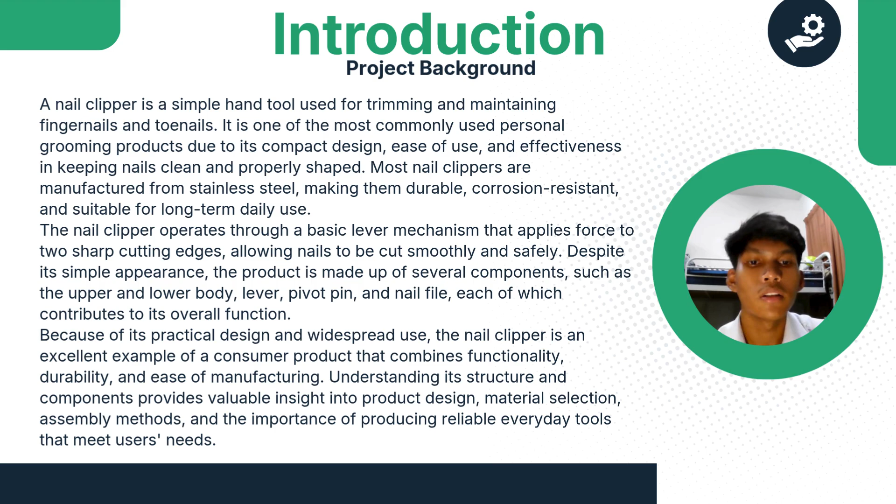Because of its practical design and widespread use, the nail clipper is an excellent example of a consumer product that combines functionality, durability, and ease of manufacturing. Understanding its structure and components provides valuable insight into product design, material selection, assembly methods, and the importance of producing reliable everyday tools that meet all of users' needs.

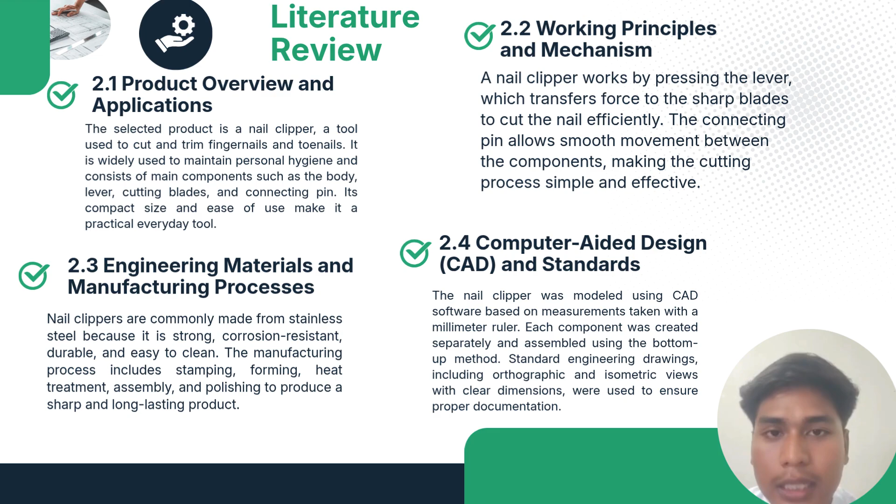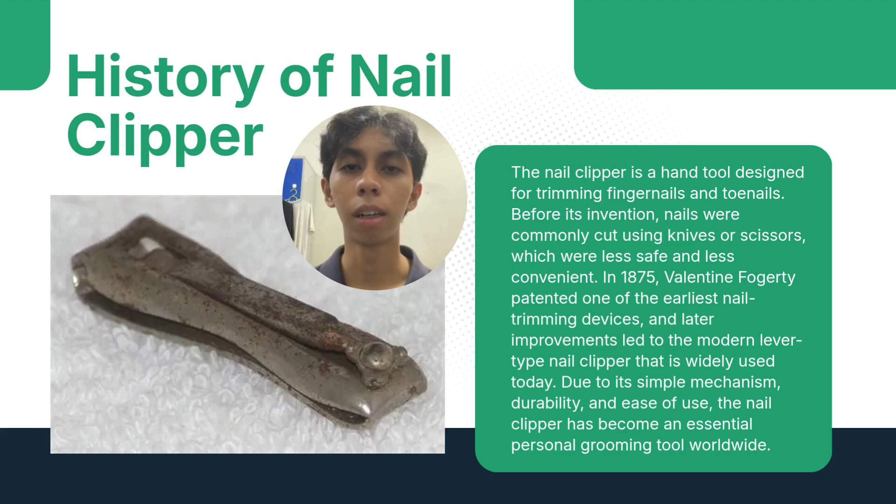Next is the history of the nail clipper. The nail clipper is a hand tool used to trim fingernails and toenails. Before nail clippers were invented, people usually trimmed their nails using knives or scissors, which were less safe and less convenient. In 1875, Valentine Fogerty patented one of the earliest nail trimming devices. Over the years, the design was improved into the modern lever type nail clipper that we use today. Because of its simple mechanism, durability and ease of use, the nail clipper has become an essential personal grooming tool worldwide.

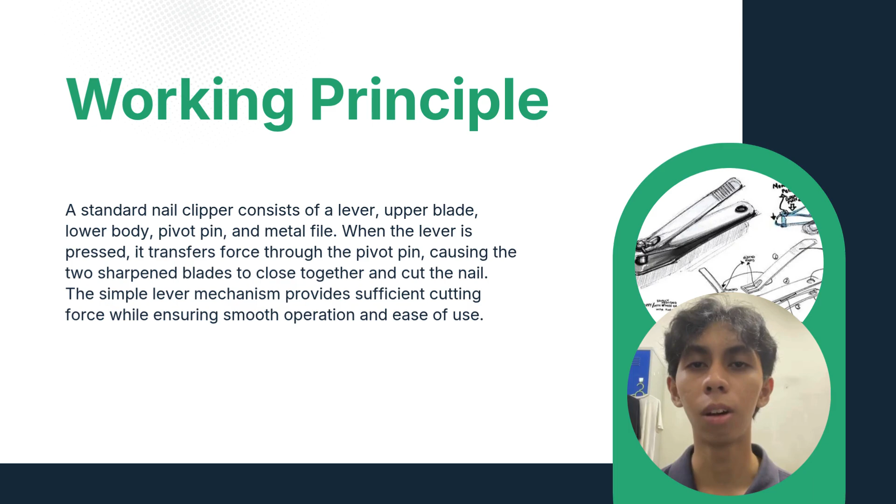Now, I will explain how the nail clipper works. A standard nail clipper consists of a lever, an upper blade, a lower body, a pivot pin, and a metal file. When the lever is pressed, the applied force is transferred through the pivot pin, causing the two cutting blades to close together and cut the nail. This simple lever mechanism increases the applied force, allowing the nail to be cut efficiently while requiring only a small amount of effort from the user.

In this slide, I will talk about the components' physical shape and function. First, we have the upper lever, a curved metal lever mounted on top of the clipper. Its function is to apply force to the cutting blades when pressed. Second, we have the upper blade, the movable curved cutting blade attached to the lever. It works with the lower blade to cut the nail. Third, we have the lower blade, the stationary base of the nail clipper. It supports the nail and provides the lower cutting edge.

Next, we have the pivot pin. The pivot pin is a small cylindrical pin connecting the lever and blades. Its function is to act as the pivot point, allowing smooth rotational movement. Lastly, we have the nail file, a thin metal extension integrated with the lever. It is used to smooth rough nail edges and clean under the nail.

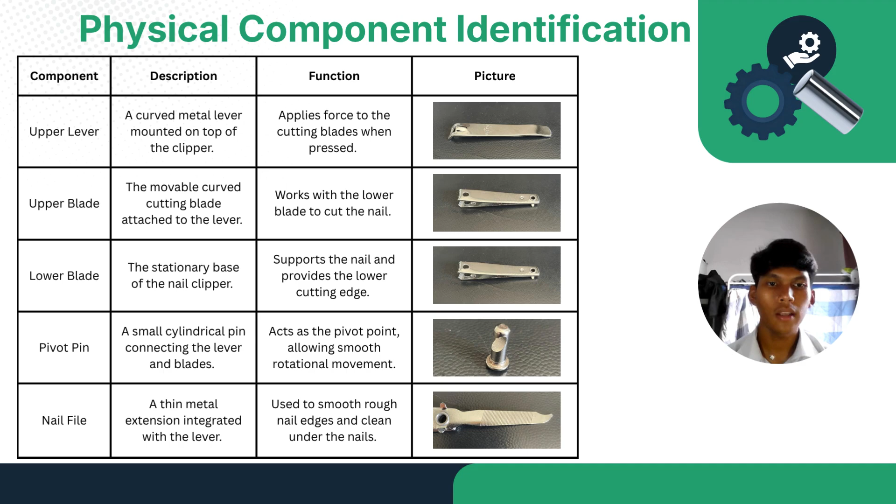I will talk about the 4 key subcomponents. To understand how this product tool functions, we first isolated and analyzed its 4 primary structural components. First, we have the base. This is the rigid flat bottom plate that acts as the primary datum plane for the assembly. It is completely stationary during the operation and provides the solid foundation against which shearing forces are directed.

Second is the blade. This is the upper curved leaf component. It is stamped from spring tempered stainless steel, allowing it to behave as a cantilever leaf spring. It contains a curved shearing edge at the front that aligns with the base.

The third one is the lever. This is the primary control interface. Its ergonomically shaped handle features a hook-style socket at the front to capture the pivot pin, translating the user's downward thumb pressure into a concentrated vertical movement.

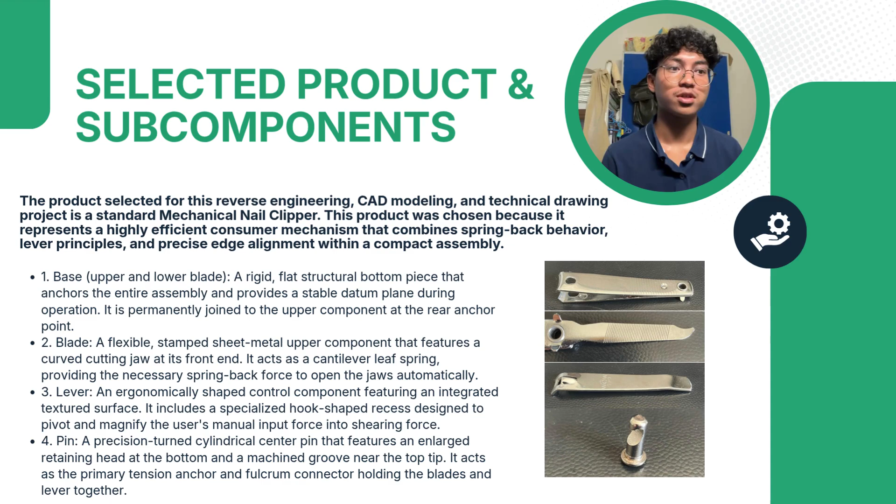And finally, we have the pin, acting as the central vertical anchor. It is a cylindrical pin featuring a wide bottom head to catch the lower base, and a small groove near the top that securely locks into the lever's hook socket, holding the entire assembly under slight constant tension.

Now I'm going to present the bill of materials. In this production, all of the components use stainless steel, because it prevents the product from rusting, so the product can last longer. For the upper lever component, the material, like I said, is stainless steel. The quantity we use is one. The function is to apply force to operate the nail clipper.

For the upper blade, the material is stainless steel. The quantity is also one, and the function is to form the upper cutting edge for trimming nails. For the lower blade, the material is stainless steel. The quantity is also one, and the function is to support the nail and provide the lower cutting edge.

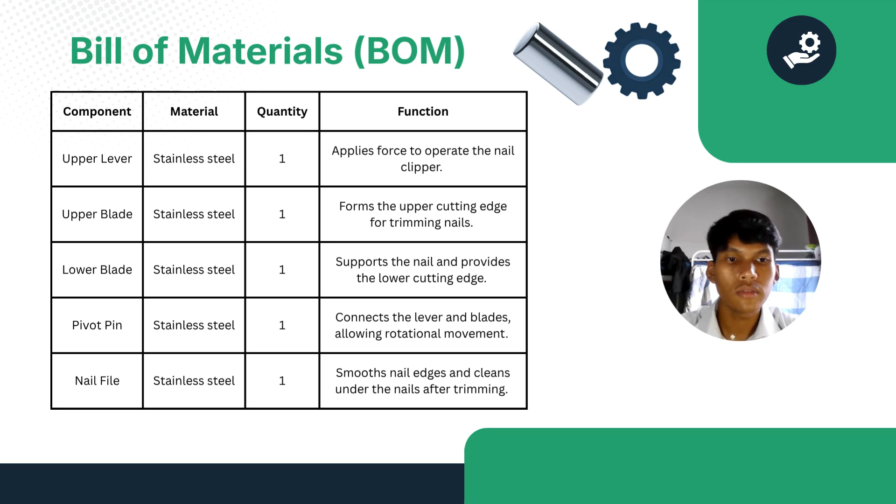Next component is the pivot pin. The material is also stainless steel. The quantity is also one, and the function is to connect the lever and the blades to allow rotational movement. And lastly, the nail file. The material is also stainless steel, and the quantity also one. It is used to smooth the nail edge and clean under the nail after trimming.

Next, let's discuss the product's operational process. The clipper operates on a compound system, a class 2 mechanical lever working in tandem with a cantilever spring mechanism. This process is divided into three distinct phases. Phase 1 is setup and activation. When stored, the lever lies flat against the body to minimize space.

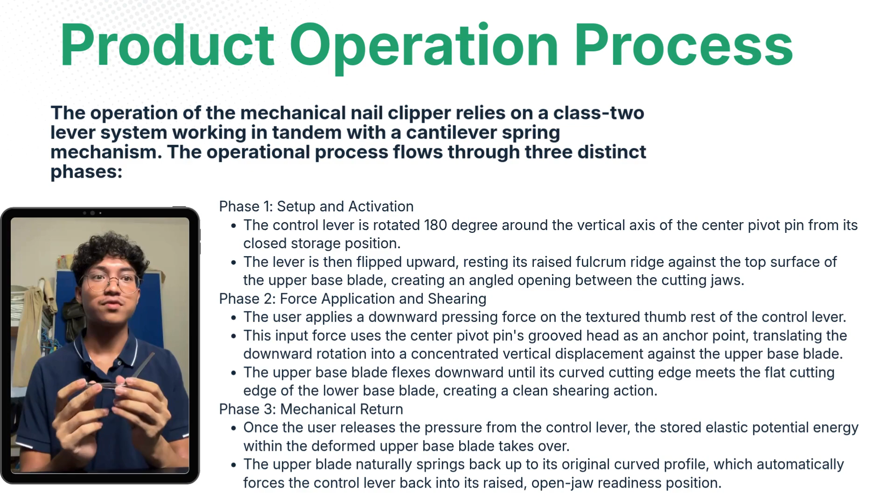To operate, the user rotates the lever 180 degrees around the vertical axis of the pin, then flips it up like this. This rests a raised ridge on the underside of the lever as a fulcrum firmly against the upper blade, creating the open jaw configuration.

Phase 2 is force application and shearing. When the user presses down on the lever like this, the mechanical action begins. Using the center pin's head as the tension anchor, the lever pivots down on its fulcrum ridge. This amplifies the finger force, displacing the flexible upper blade downward.

The curved cutting edge of the upper blade meets the flat edge on the stationary base, creating a highly concentrated shearing force capable of cutting through dense material cleanly.

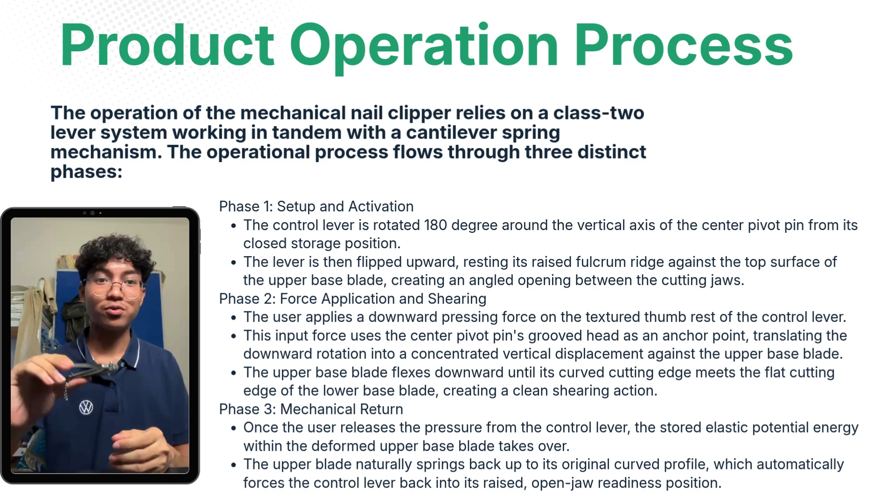The final step in the cycle is phase 3, the mechanical return. Once the user releases the downward pressure on the control lever, the stored elastic potential energy within the deformed upper blade is discharged. Because the blade was manufactured to act as a spring, it immediately returns to its natural curved open jaw.

This upward vertical force pushes against the front of the control lever, automatically pivoting it back up to its ready position. This mechanical return loop operates seamlessly without requiring any secondary spring, demonstrating the clever self-resetting efficiency of this simple mechanism.

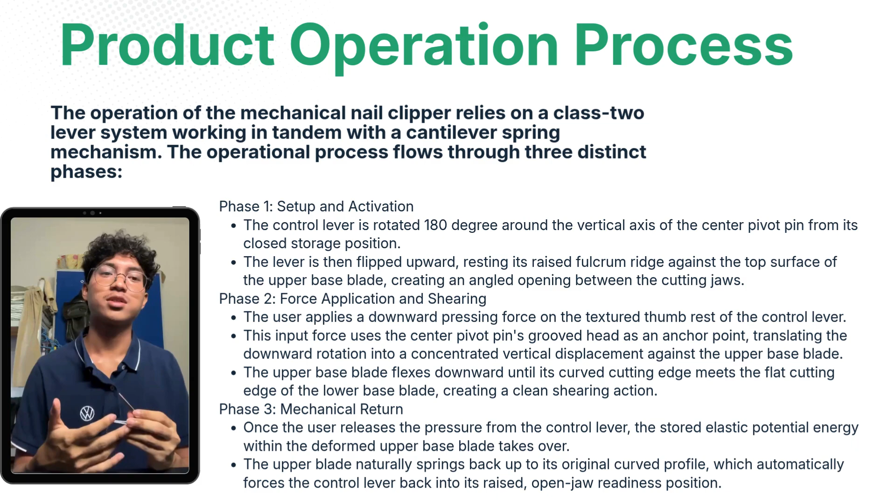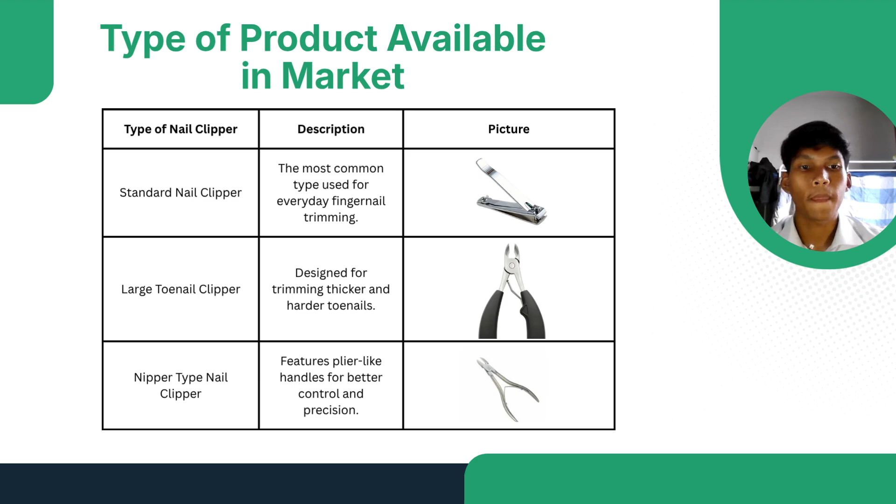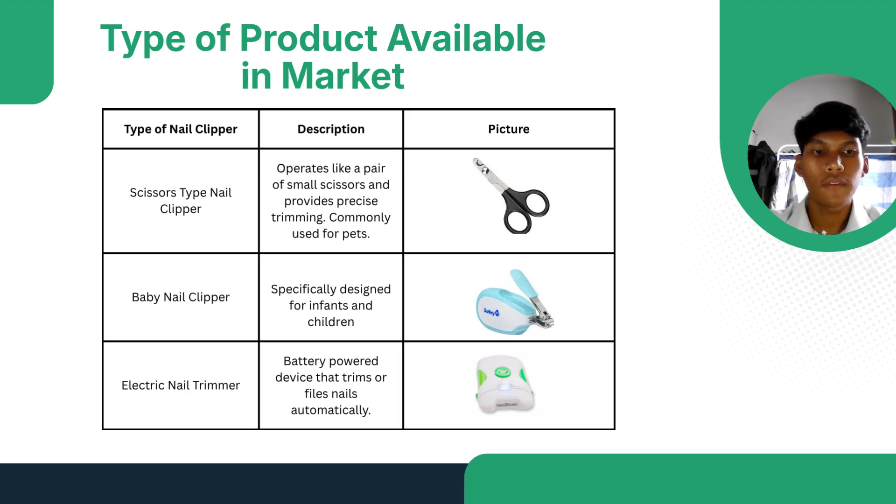Next, we have the nipper type nail clipper. It features plier-like handles for better control and precision. Fourth, we have the scissors type nail clipper. It operates like a pair of small scissors and provides precise trimming. It is commonly used for pets. Next, we have the baby nail clipper, specifically designed for infants and children. Lastly, we have the electric nail trimmer, a battery-powered device that trims or files nails automatically.

In conclusion, this project successfully achieved its objectives by applying the reverse engineering process to a nail clipper using AutoCAD. Through disassembly, measurement, manual sketching, and CAD modeling, we successfully produced accurate engineering drawings and 3D models. This project enhanced our understanding of engineering drawing and reverse engineering while improving our technical problem solving and teamwork skills.